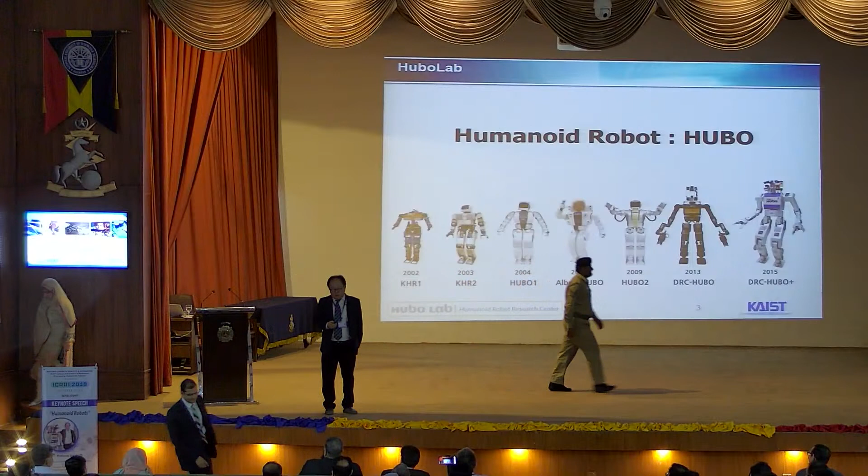I did not get the fund from the government anywhere, but my institution decided to support me with only 50,000 US dollars value. With that money, I made this one. It took just 1.5 years to build, and it was proven - it basically proves that it can work.

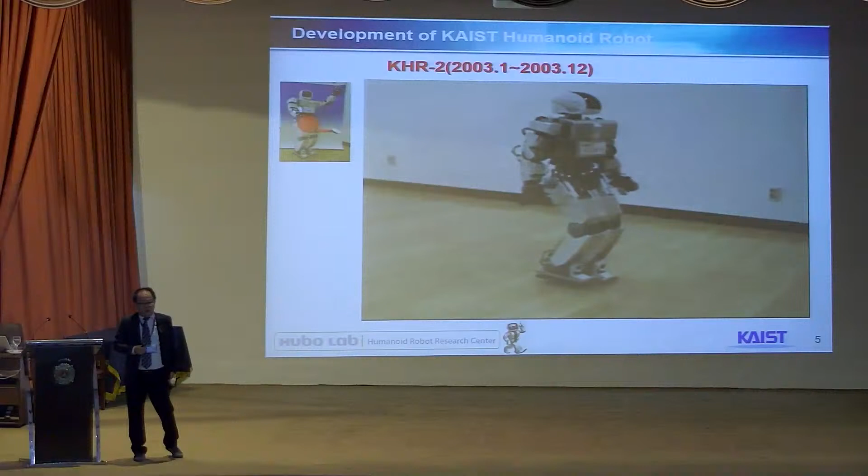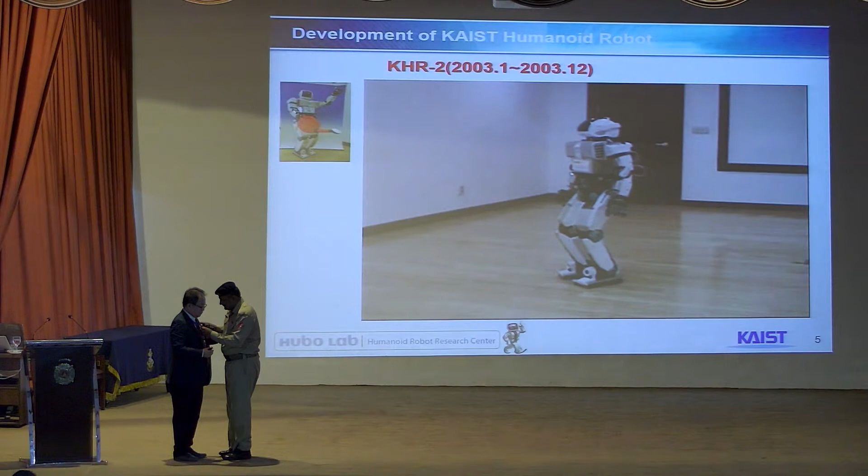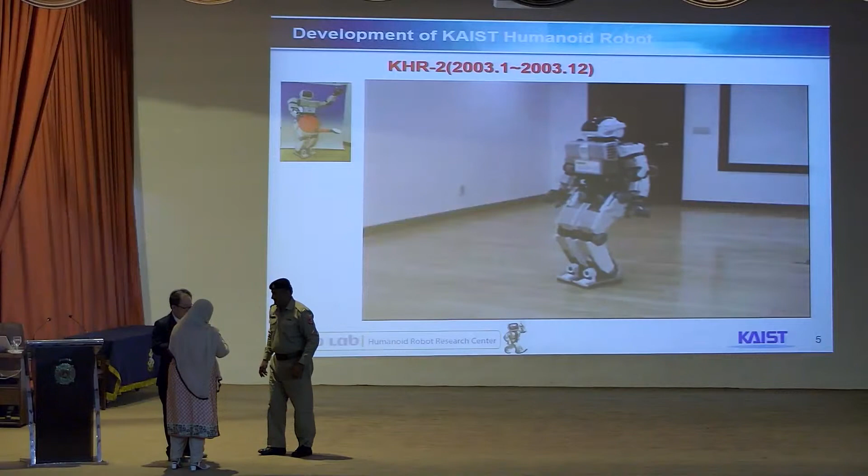When I released this machine with very limited budgets, the next year the government decided to support me with big money for the next one. That was the Hubo - it was born in year 2004. So thus far, it took only 3 years to create this final version of Hubo.

It is the third platform from KHR1, KHR2, and KHR3. It does have a vision system, 5-finger movements, and it can walk and make any kind of gesture that could follow human motion, as you see.

The next year, I was requested to make a very interesting, never-released robot, so I decided to make this kind of Android type humanoid robot. This very famous robot is named Albert Hubo, because his face looks like Albert Einstein, isn't it? He can move his face with very small tendons inside, and he can express his emotion through facial muscle movements.

This robot was very famous because it was first released at the so-called APEC summit - 20 world summits gathered, and it was announced on that occasion.

Another interesting robot the next year was the Hubo FX1, a human-carrying machine. It can carry up to 150 kilograms of freight, and it is controlled by joystick by the operator.

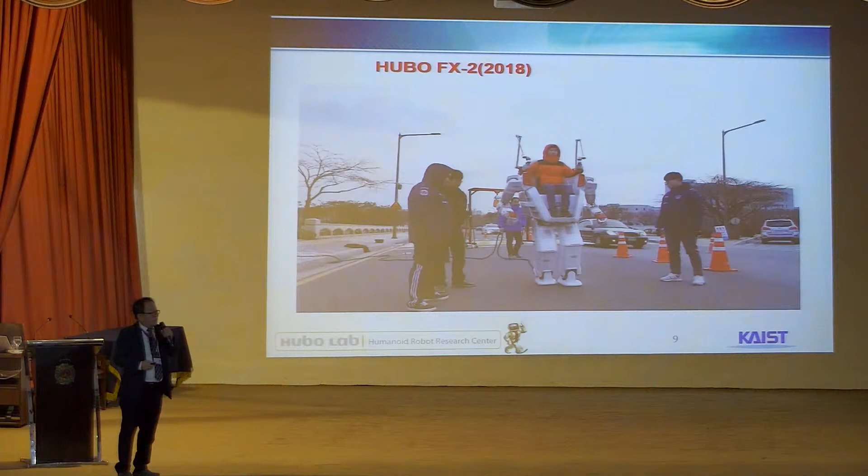This robot was revived 2 years ago, named FX2. This robot is a little more sophisticated because it has big arms - an arm can be controlled by a data device, so the operator could directly control the arm through the data device. This robot was specially designed for delivering the Olympic torch during the Winter Olympics 1.5 years ago, so this robot became very popular.

On YouTube, they are everywhere. This one is the first robot to deliver the Olympic torch in the torch relay.

This one was made in year 2009, named Hubo 2. It is very light - I believe it is the world's lightest robot at this size. It weighs only 40 kilograms and is very fast.

It can run, it can make any kind of gestures, including sign language. If you are able to read this sign language, it means hello everybody or something.

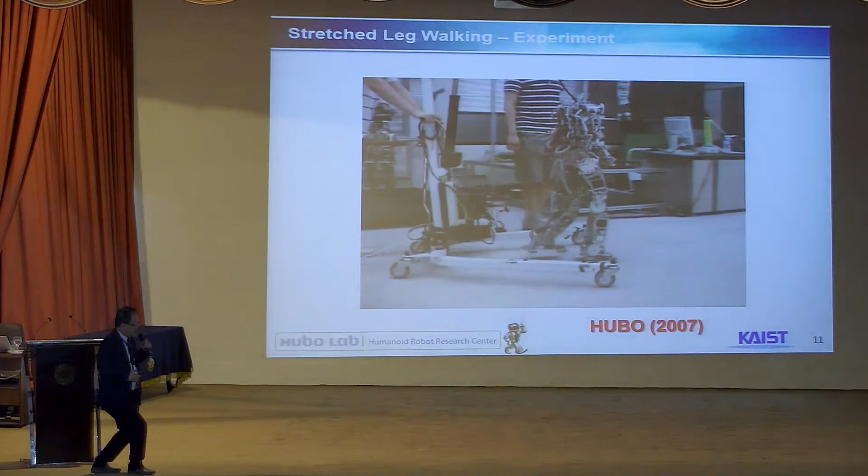In walking, we tried early the straight knee walking. Usually humanoid robots use bent knee walking like this way. The reason the humanoid robot is always bent like this is that this is the most stable form for humans also - if the ground is moving, you naturally do it this way.

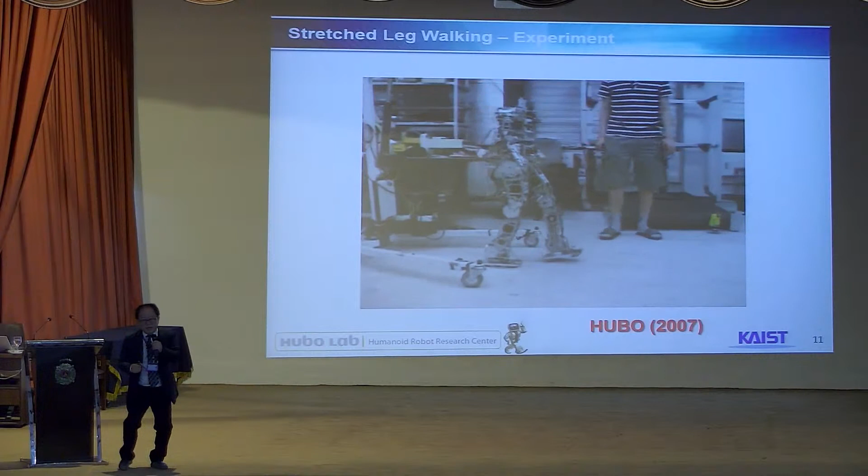Because in this pose you can move in any direction with your foot, the so-called horse riding form. So all humanoids use that form. Without that, it has to use dynamic walking.

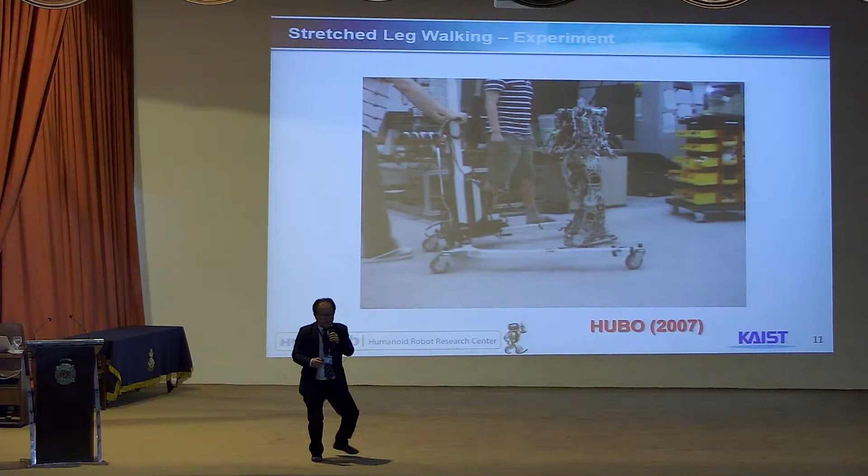Dynamic walking means you are always falling down, falling down, and you place your foot before falling down - that is dynamic walking. So during dynamic walking, if someone kicks your leg, you will fall down. But in static walking, it's stable everywhere, every time stable - that's the reason it's the most stable form, in bending walking.

In this straightening walking, it is very dynamic, so it can save a lot of walking energy, and it also looks more like a human.

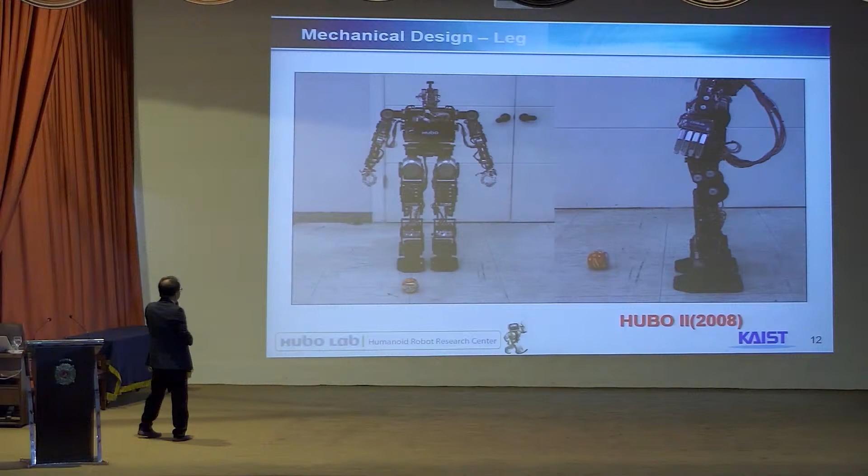This is another gesture of this humanoid robot - it can pick objects up from the ground, and it can fully fold its leg and knee. It can also make this kind of martial art form.

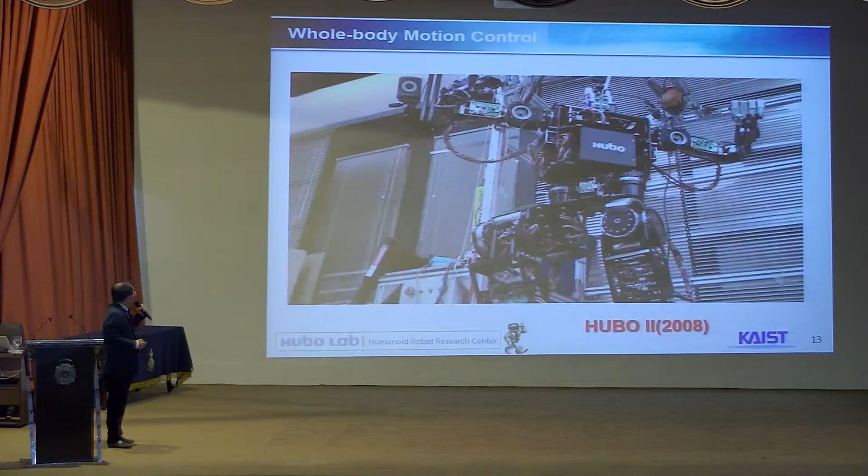To perform this kind of movement, all the joints must be compliant. It uses a very high gear ratio, 1 to 100. It's very position-based, velocity-based actuators, but by measuring the force torque sensor between the leg and also some inertia sensor on the chest, they stabilize and hold the body. The whole robot looks very flexible and compliant. That is very essential to perform that.

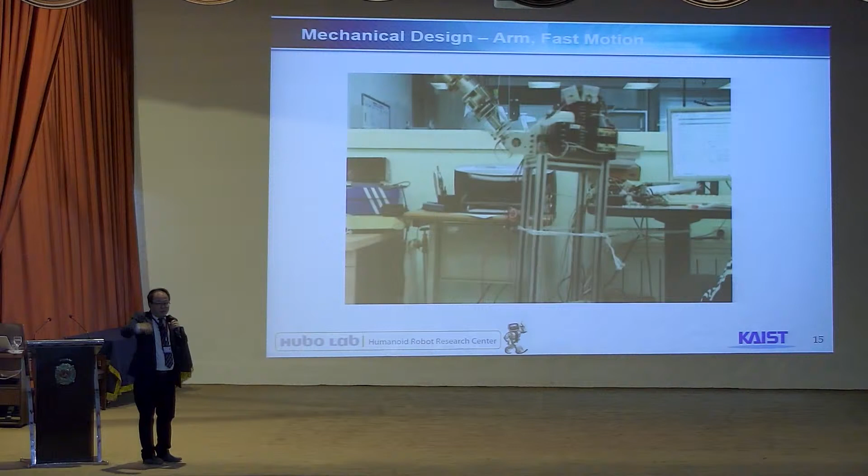This one shows how we could design the arm. The arm must be really fast, so stop and go motion - stop, go, stop, go, not a sine wave. To perform that, very precise control is needed. You have to manage the reduction gear in a very effective way, and also remove heat very effectively.

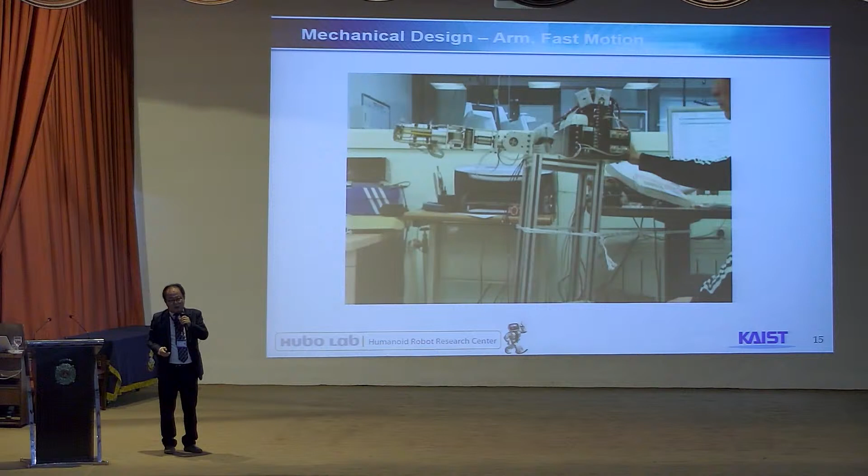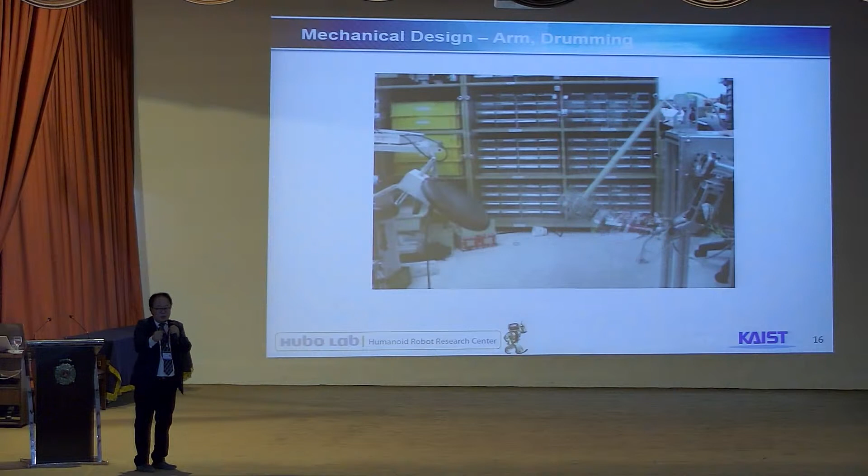We demonstrate this one. Hitting a drum is not an easy task for the humanoid robot, because the arm must be compliant and should accelerate from the rest position. The hitting impact must be very strong, and after the hit it must stop naturally, without breaking itself. We tested this when we designed the robot - the robot arm is powerful enough to hit the ball to the wall.

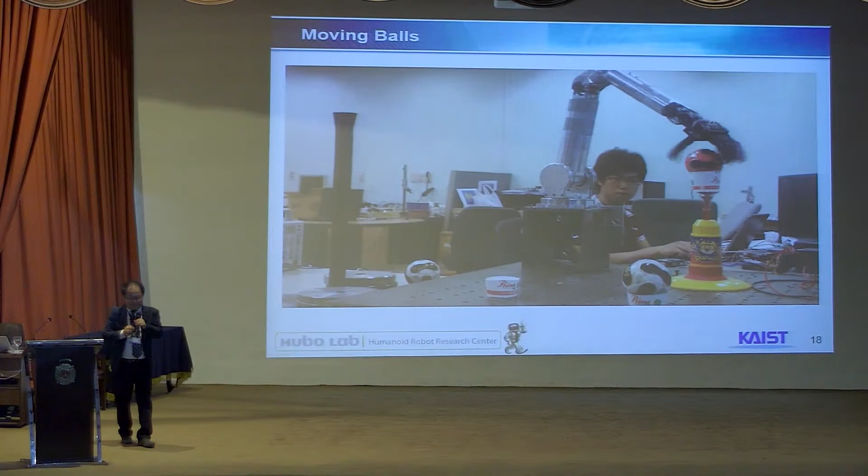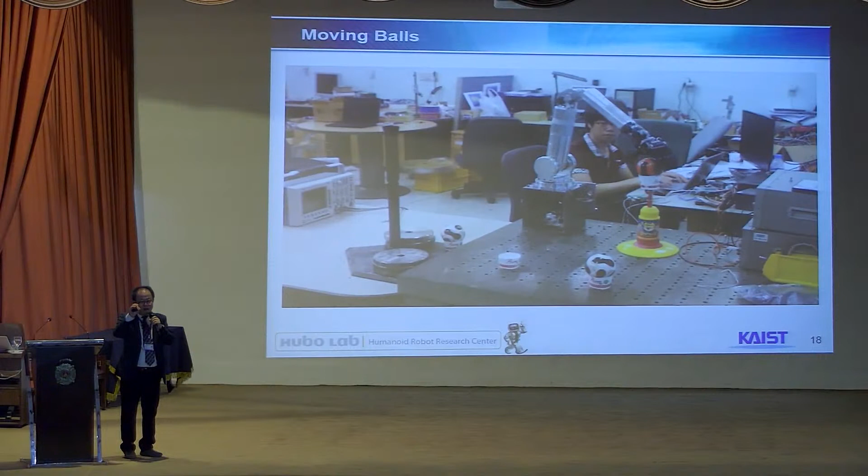We also tested this kind of thing - this is 1-to-1 speed, no acceleration, just very natural. This arm's weight is 3.5 kilograms, very light, and the hand itself is only 350 grams. We use this kind of hand on the humanoid robots.

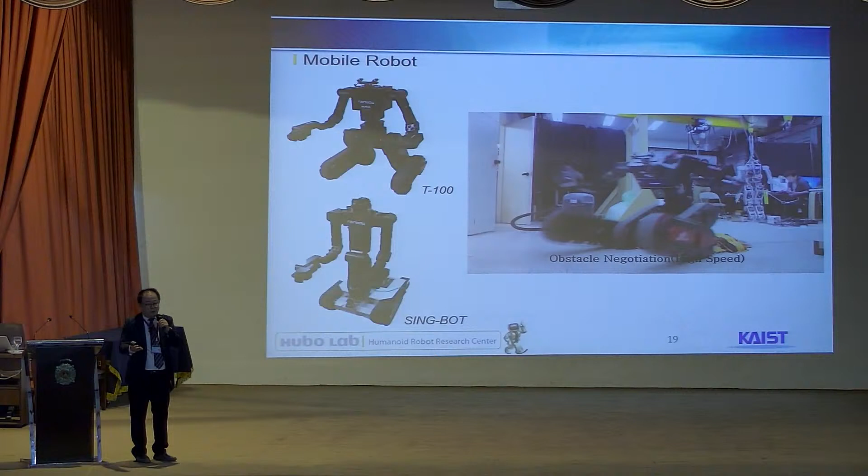We also use the upper body to handle heavier materials. This project was related to the Korean defense department, and there is a prototype robot to retrieve wounded soldiers or persons from the battlefield. It's supposed to carry up to 60 kilograms - that's 60 kilograms, so it's a prototype. It should also climb a 45-degree slope. This model was delivered to some other countries to make their own robots.

But anyhow, this arm technology was used to develop the collaborative robot. I'll explain this part a little bit later.

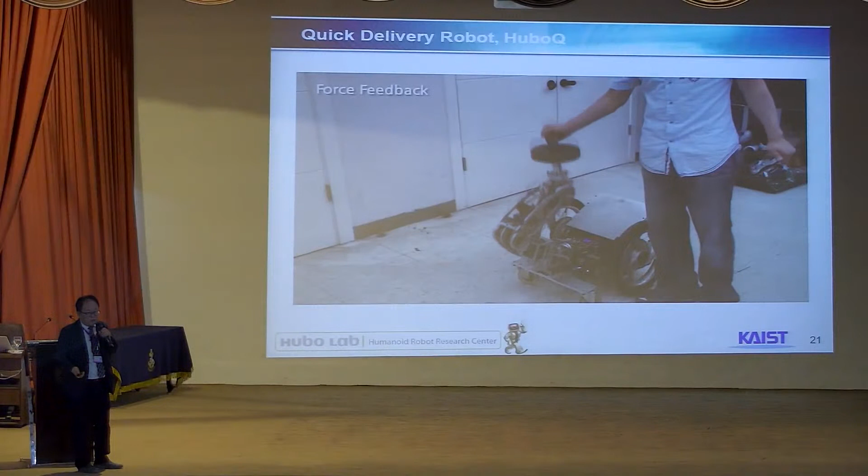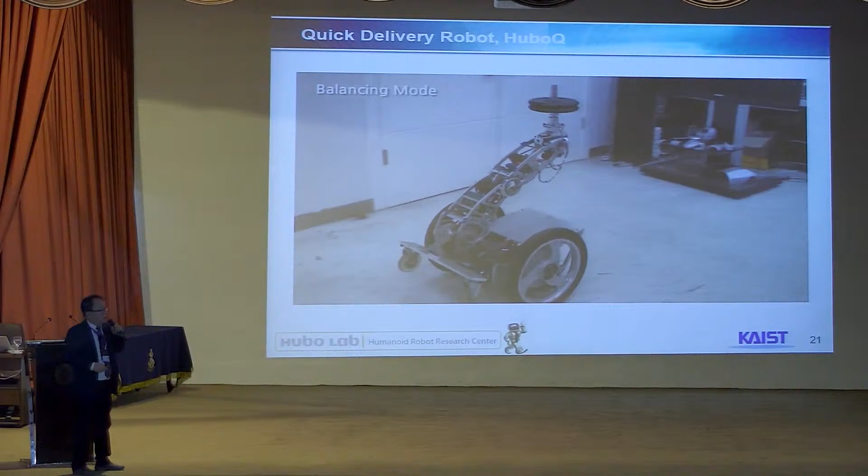The leg was also tested another way - we took the leg and put a Segway-type rolling platform under it, and it tried to stabilize itself so it never falls down. It can deliver a cocktail without dropping or spilling it. It's also very compliant. The force torque sensor mounted just below can amplify external force, like an exoskeleton. The operator can ride on this machine. It's very versatile - a very interesting toy for us.

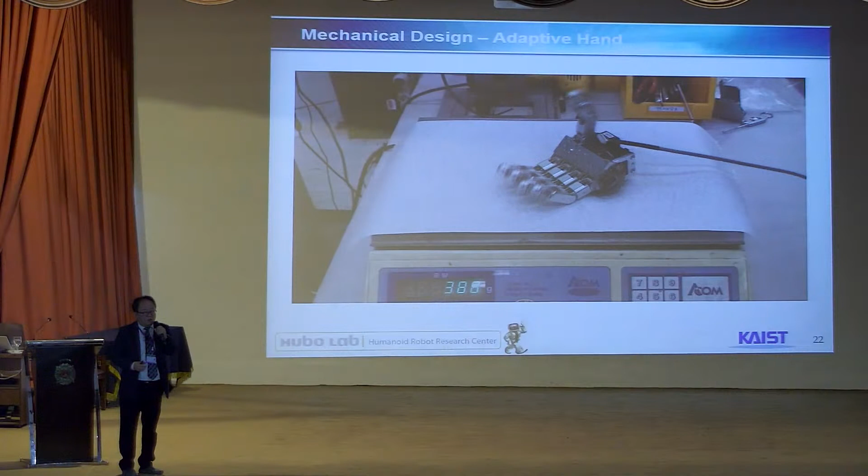Expensive also. This is a Hubo hand - it has 5 fingers and 5 motors independently, and is tendon driven and under-actuated, and it is shape adaptive. So once an object is decided, it grabs naturally according to the shape of the object.

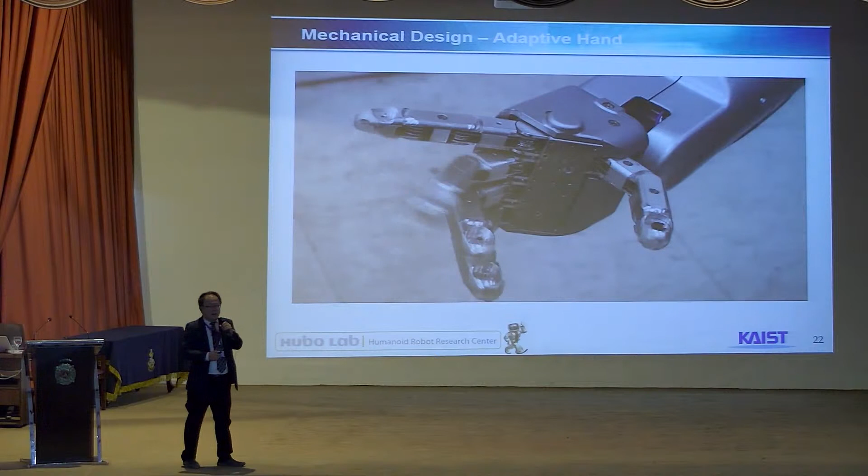As you can see, it can handle many things, and it's powerful enough - this is about 5 kilograms, it can handle 5 kilograms of objects. It can even hold a chair like that. And it weighs only a little bit more than 380 grams, including all the actuators.

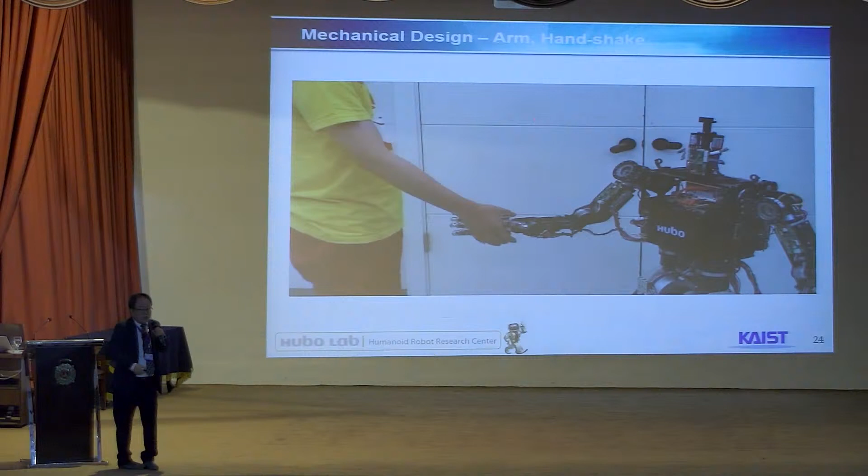Now it's watching. This is the wrist movement - it's 3-way movement in the wrist, making very general motion. It has a force torque sensor between the wrist, so you can detect external force and torque, allowing natural interaction with the human or environment.

We check the strength of the arm, so we ask him to do push-ups, and we torque him for a moment, and he survives and keeps doing it forever.

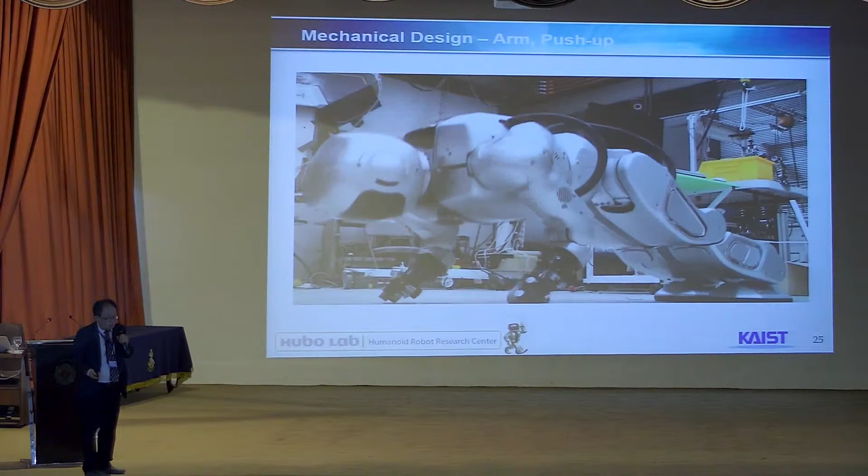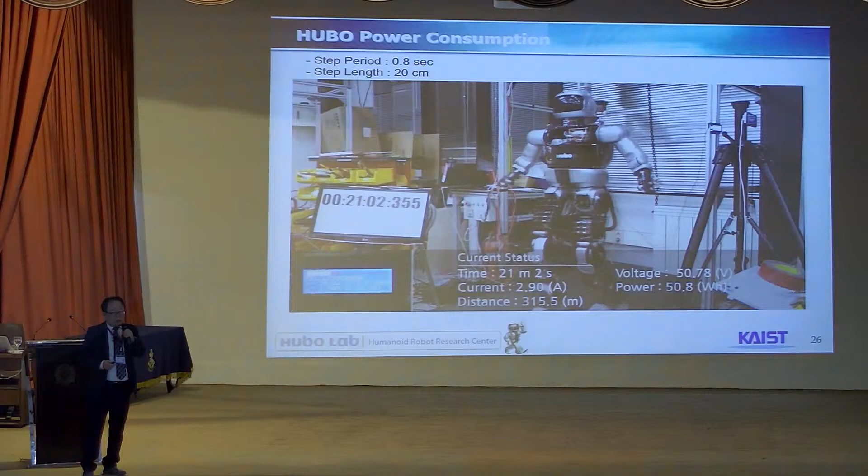We also check the time to endure the battery life. With a full charge, we just keep it walking until it falls down. Now you see 40 minutes passed - no stopping, just continuous walking. 1 hour and 20 minutes, still walking. 1 or 2 hours, still walking. And at 2 hours 13-14 minutes it falls down. So it runs more than 2 hours without stopping on a single charge.

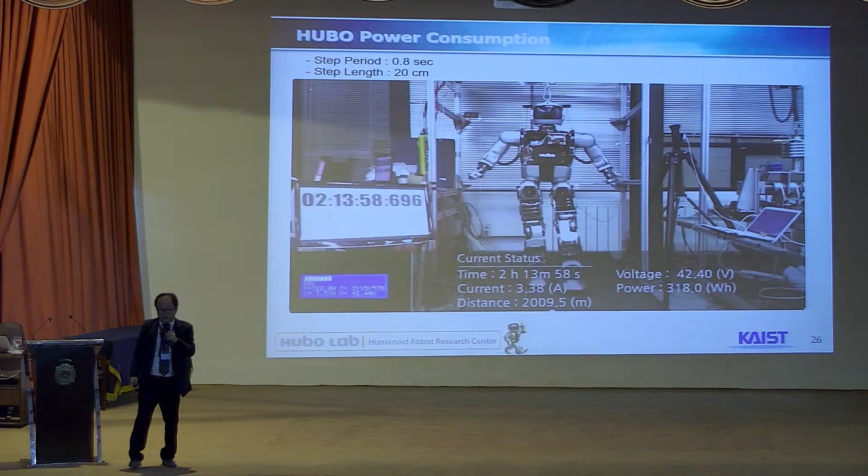We also check the temperature of each joint, and the delta T temperature increase is less than 5 degrees compared with the environmental temperature.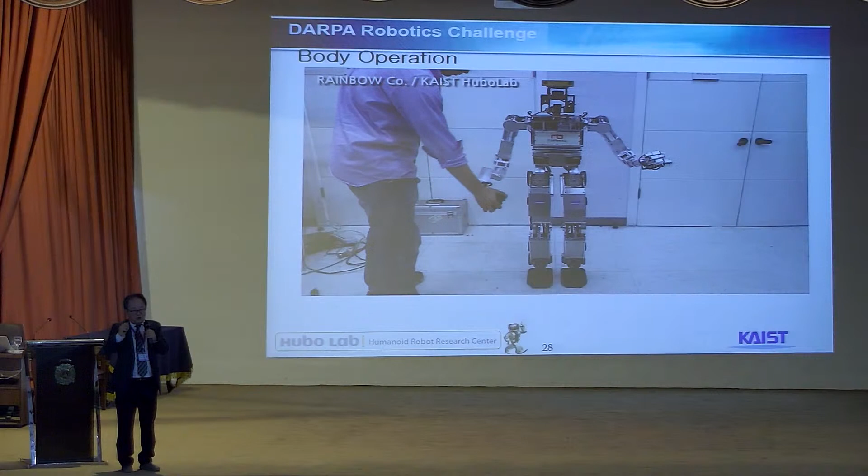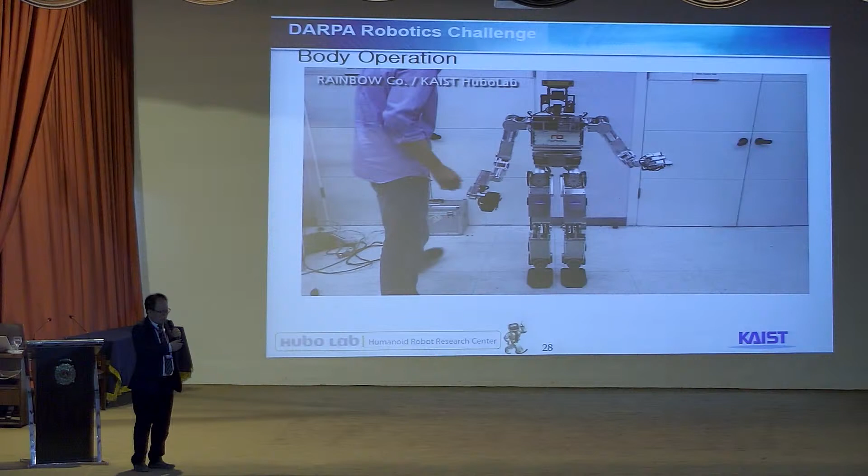The robot is very rigid, and we have to make it very flexible. There are two ways: you may have series elastic actuators or force torque sensors in each joint, but that makes the system complicated. So we did not use that kind of active torque sensor. We only measure current for the joint motor, precisely model the motor and friction, and then compensate for gravity, creating a kind of gravity-zero situation. With that technology, we can run these kinds of experiments.

For example, say the robot is supposed to drive a vehicle. The relative distance from the robot body to the steering wheel is changing, but it's still performing the rotation, turning the steering wheel. He does this without precise measurement of the distance between body and steering wheel, performing it through compliant control of the robot.

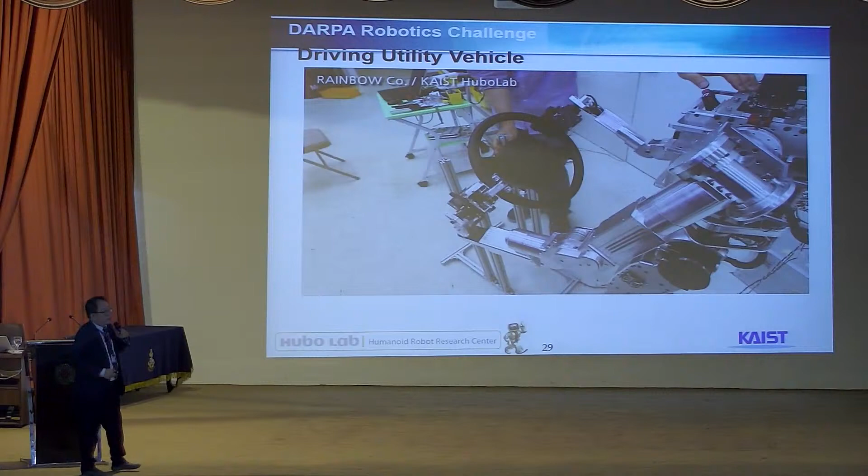To perform that, you have to decouple the coordinates and use Jacobians, etc., to make it work in specific directions. So for example, force in this direction, velocity in this direction, position in this direction—you have to decouple that without actively measuring force. We only used current. That is very technical, actually.

And also we check the balance, so he has to survive that kind of external impact.

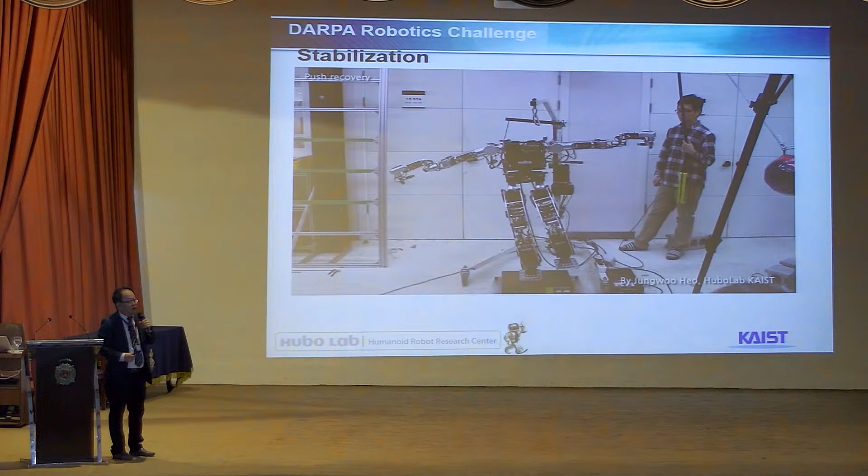And also we tested this kind of jumping on the stone.

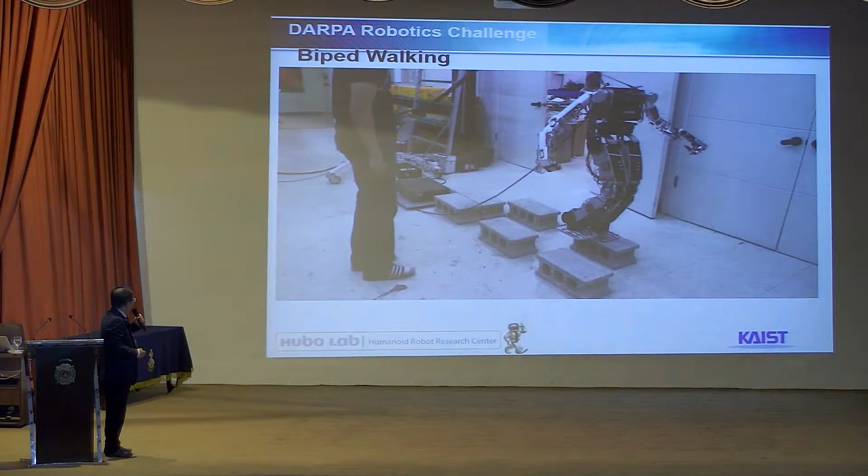And also we tried to go over rough terrain, because the slope and height are not specified. He has to have good kinematics to handle big height and big slope without losing stability. Each weight he's carrying is 3 kilograms.

Each one is like a very heavy weight on him—he's simulating his arm's weight—and he also has to survive this kind of very severe disturbance on the ground.

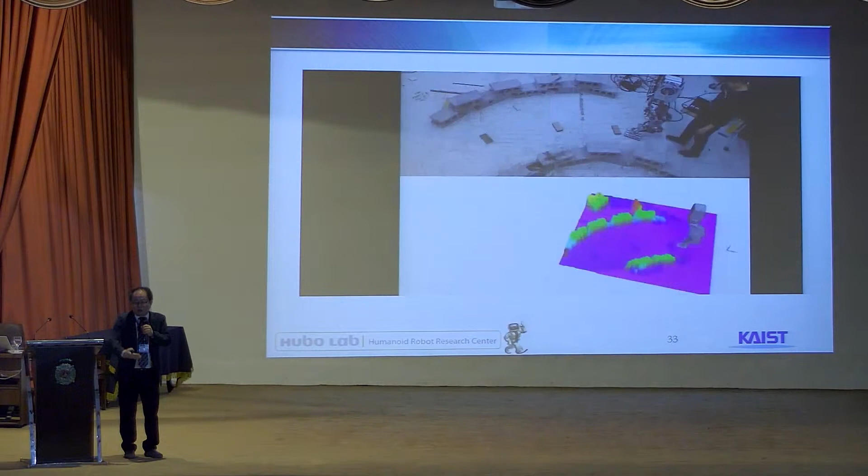We call it blind walking. Blind walking means the robot does not have any prior knowledge about the ground. He has to survive using only his tactile sensors.

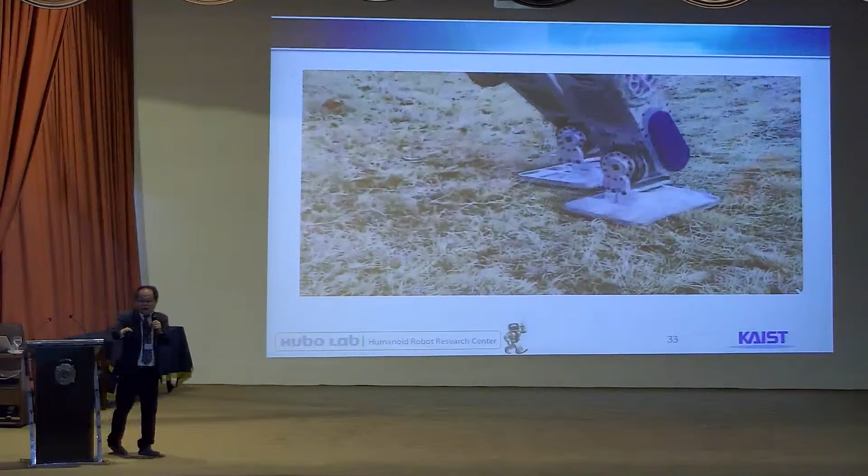He also has to survive on rough terrain, and also ground condition changing—stiffness changing over grass, over soil, over stone, or over concrete. We are testing those kinds of things.

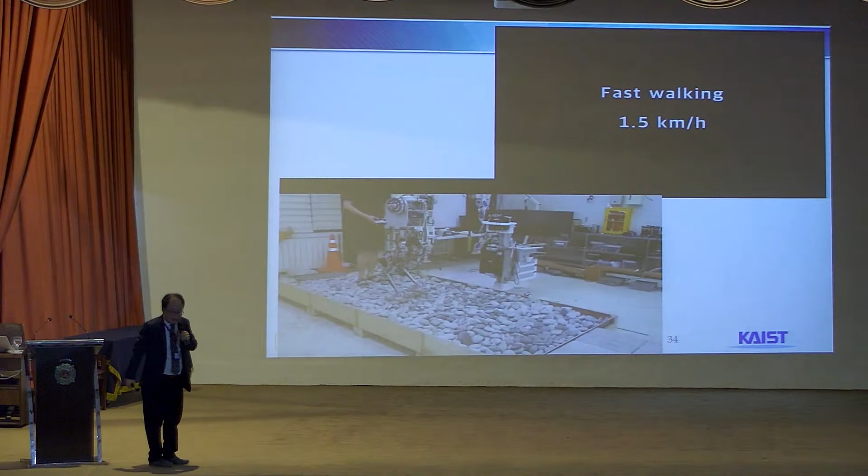So, stabilizing by stepping. There are three ways to survive when pushed externally. One is what we call the ankle strategy, where we basically just use the ankle. The next one is the hip strategy, meaning we use the whole body this way, like a counter moment.

The third one is stepping. Now he's testing stepping, and we also tested blind walking on unstable ground. I will show you again.

This stone is unstable, not fixed, so it is always moving and unstable. So during stepping, it's changing the orientation.

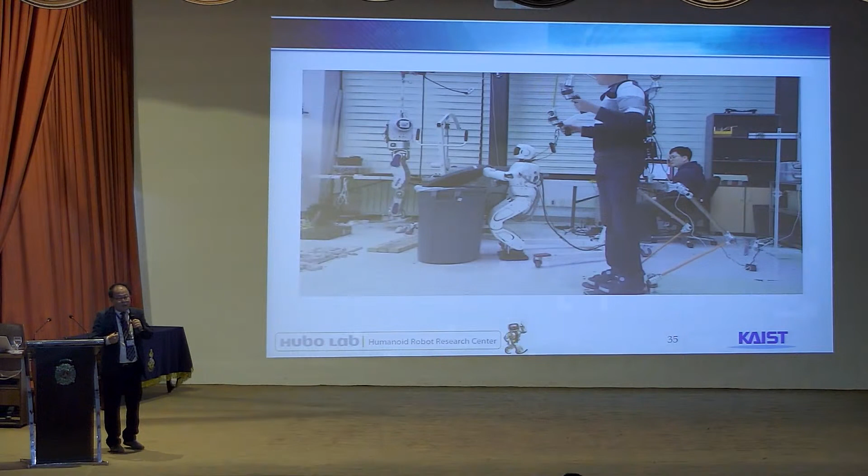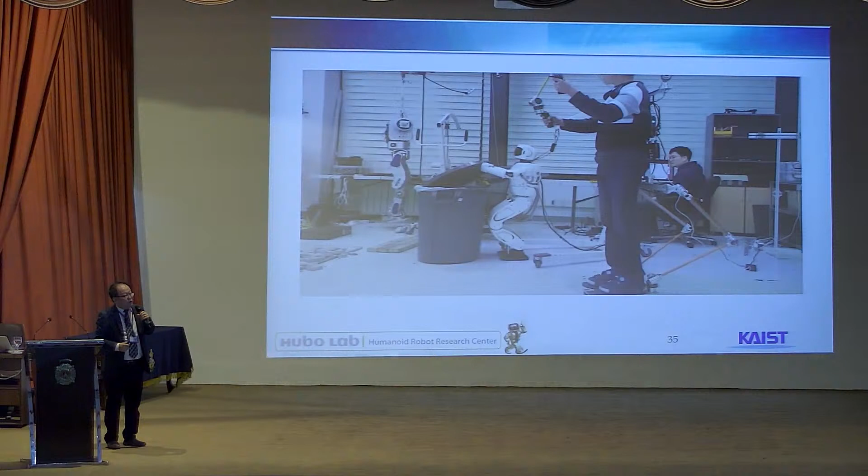So he is just following his footsteps, and it can be remotely controlled that way.

And this is a quadruped robot, which we recently started developing.

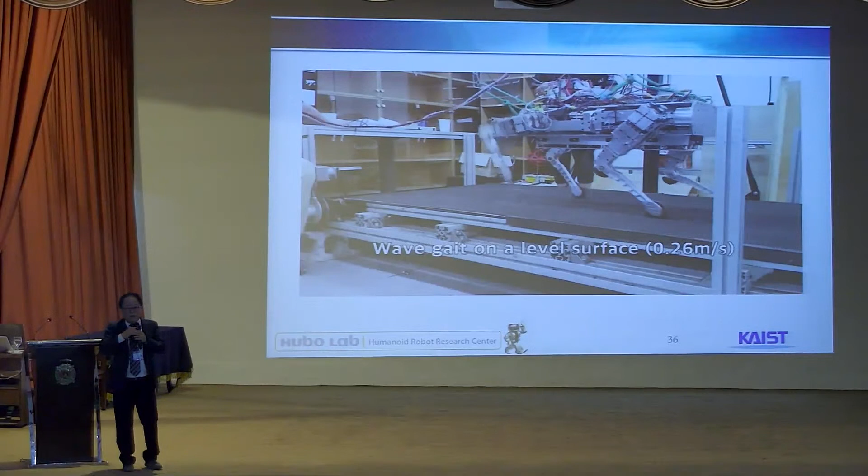One issue when developing this robot was how to remove heat effectively. When you design this kind of humanoid or bipedal robot, you should have less weight on actuators and reduction gears, and you have to draw big torque from the limited size of the robot's motor. To draw big torque, you have to apply very high current—then it burns the robot.

So the key is how to remove the heat effectively. If you can effectively remove the heat, you can power up three or four times without burning it. So we tested heat pipes, active convection, heat fans, etc., to find the way to remove heat effectively.

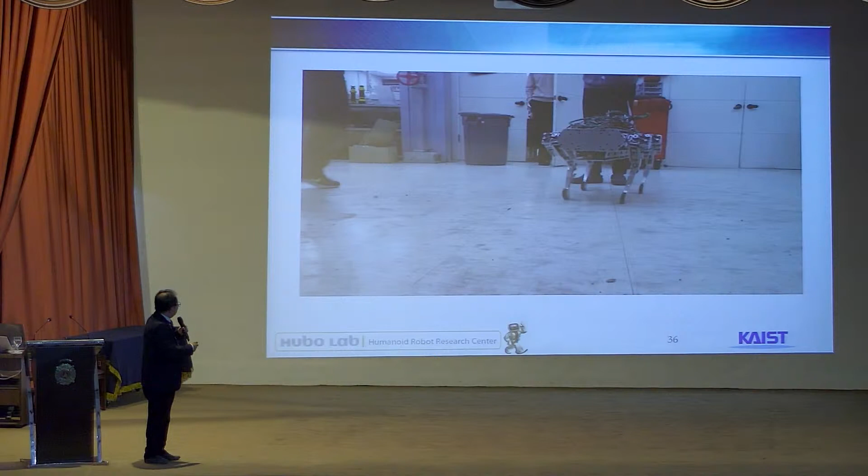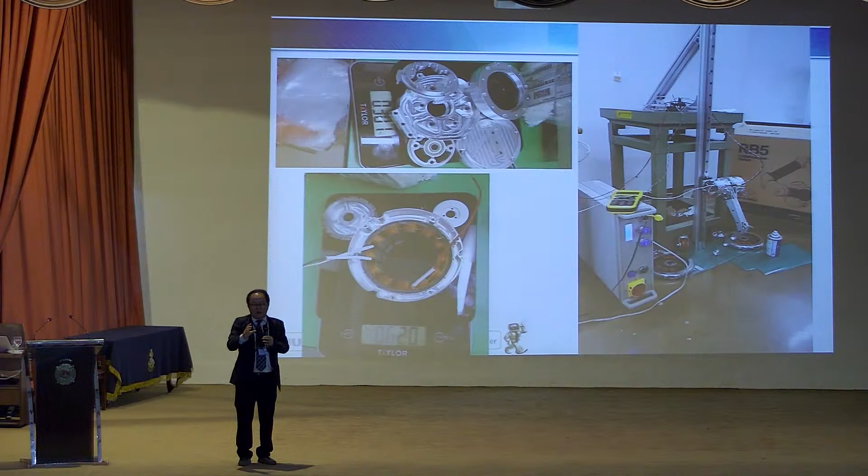We also have to make it lightweight. For example, starting three years ago, we began designing our own motor. We wound the coil our own way, because you can buy a motor off the shelf, but then you have to find the specification and design your robot based on that specification—that limits your design. So we changed direction, because to have a better, non-existing robot, you should have your own actuator with your own specification, and build based upon that.

So we can design all different kinds of robots and motors, and we wind the coils ourselves. Sometimes we invent our own winding machine, because the coil must be densely wound. So we invented our own winding machine and built it. And also we design—oh, sorry.

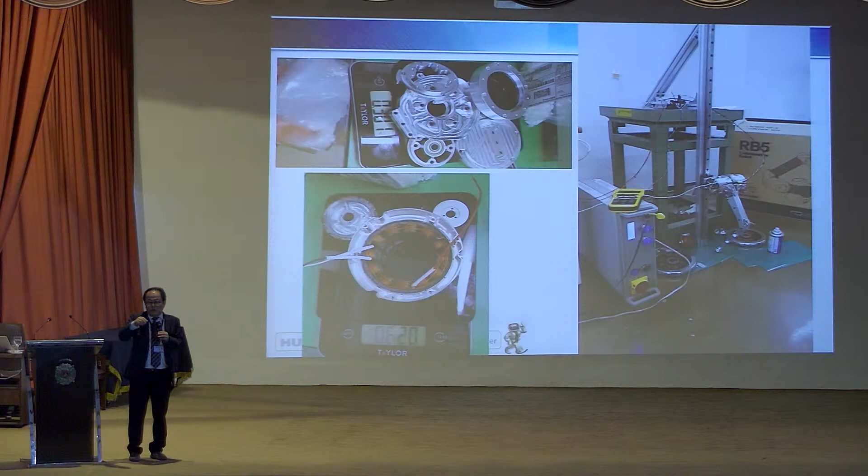We also have reduction gears. We have two types we've already made: a usual planetary gear or compound planetary gear, which we don't cut ourselves but design and ask others to cut and reassemble. We also have a cycloid gear, and to reduce friction we use very strong needle bearings inside.

We started 15 years ago from scratch, without any knowledge and without a budget. Three years ago, we started to build everything ourselves: actuators, motors, reduction gears, and everything else.

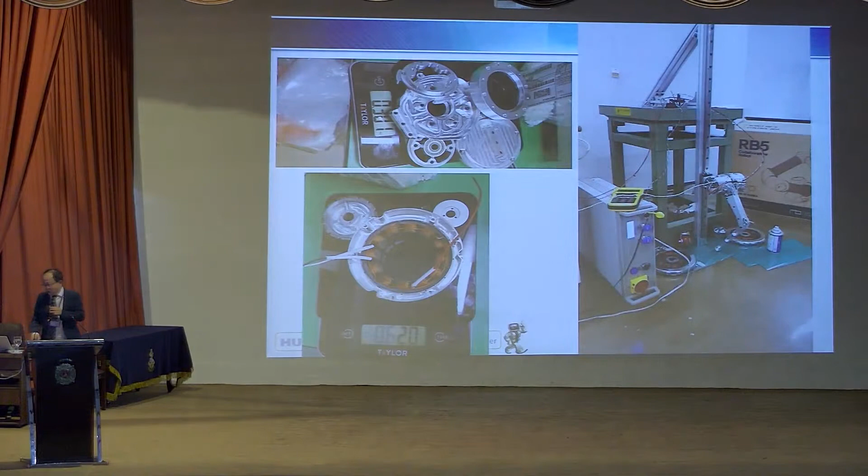We tested this actuator through a jumping motion. As you can see, it jumps quite high, drawing almost 20 amperes at most.

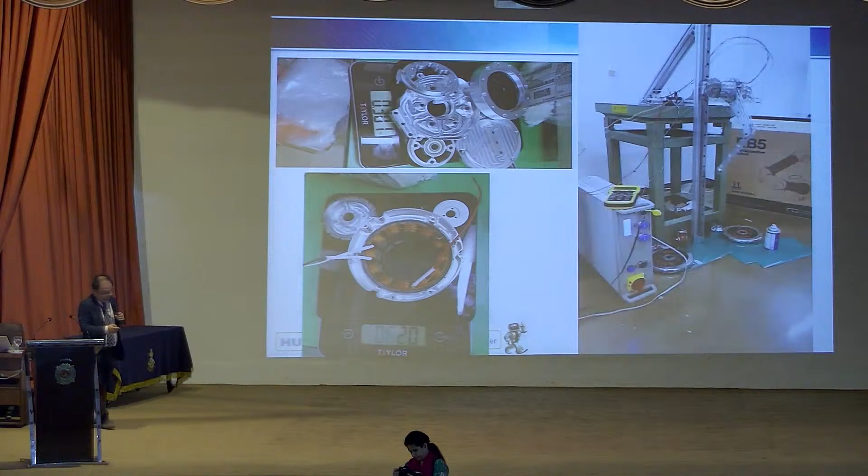Next, we built the quadruped robot using these actuators. This was made just one month ago, a very new one, and it was displayed in an exhibition. People liked it. It's not jumping yet, but it will be jumping very soon, like the cheetah robots. We are trying to achieve that very soon.

This one is hydraulic. We started studying hydraulic systems about 3 years ago. The difficulty was that nobody knows about hydraulics since there's no hydraulic engineer nowadays - it's old technology with no papers. Students don't like studying hydraulics because how could they write a paper without one? Without a paper, you cannot get a degree. So it was very hard, but I pushed my students that we should make it.

We started from scratch, nothing. We just read texts, and I designed the basic things. We started to make the valve - a direct drive valve. Usually these are two-stage valves: a small electric signal, then some hydraulic line amplifies that, and then it moves a big cylinder.

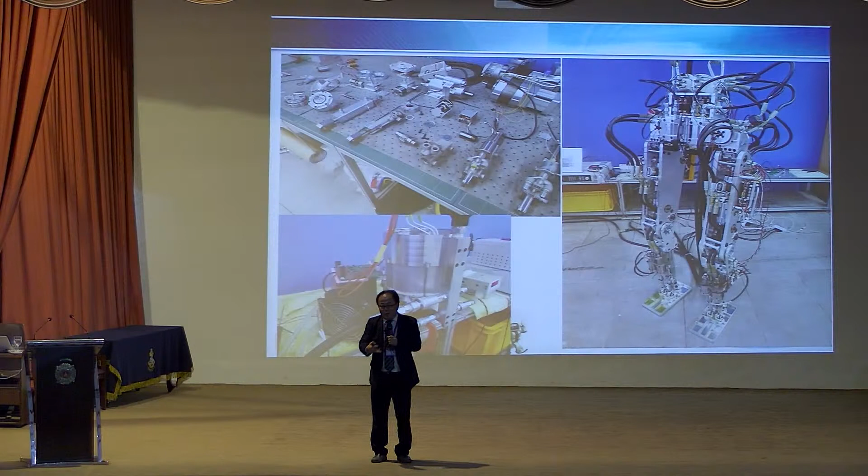This consumes 10% of total hydraulics. That means if your pump capacity is about 10 liters per minute, and each joint needs, say, 1.5 or 1 liter per minute usually, then each valve consumes about 0.1 liter per minute just for control. But for a humanoid robot, you need 15 or 20 actuators, so if you sum it up, half of your capacity would be used only for controlling the valves.

To prevent that situation, we use direct drive - a very strong servo motor driving the shaft directly. It needs 80 newtons with a very small stroke of 0.5 millimeters, so we designed our own magneto-electric systems.

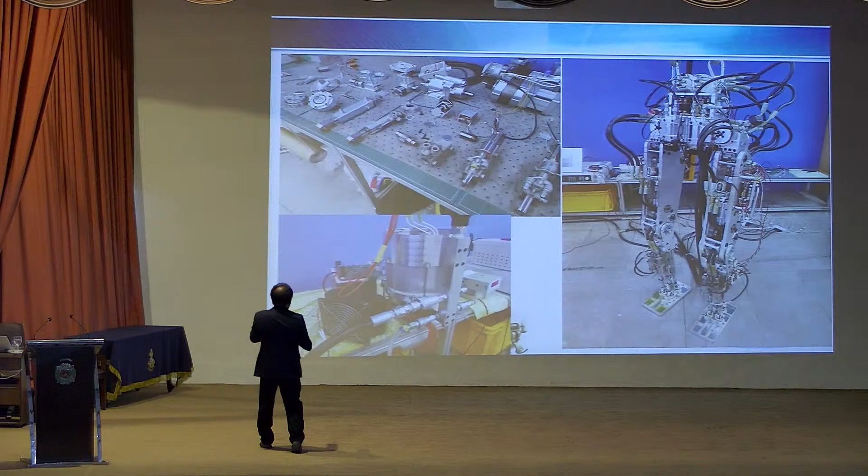We built, as you can see, all the cylinders and even the pump - we designed our own motor and pump system, and everything is merged into oil so the heat naturally dissipates. A commercial one, even a very good one, weighs about 20 kilograms.

Ours is 11 kilograms. We reduced the weight because it's impossible to purchase that kind of servo valve and cylinder in the market - industrial hydraulic systems are very, very heavy, mostly used for military bases, missiles, and so on. It's impossible to get them in the civilian commercial market, so that's why we built this ourselves.

We built all the parts through many failures, and we tried and built our own, 100% our own design. We don't buy the cylinder, we don't buy the servo valve, we don't buy the amplifier - we buy nothing, we just build it.

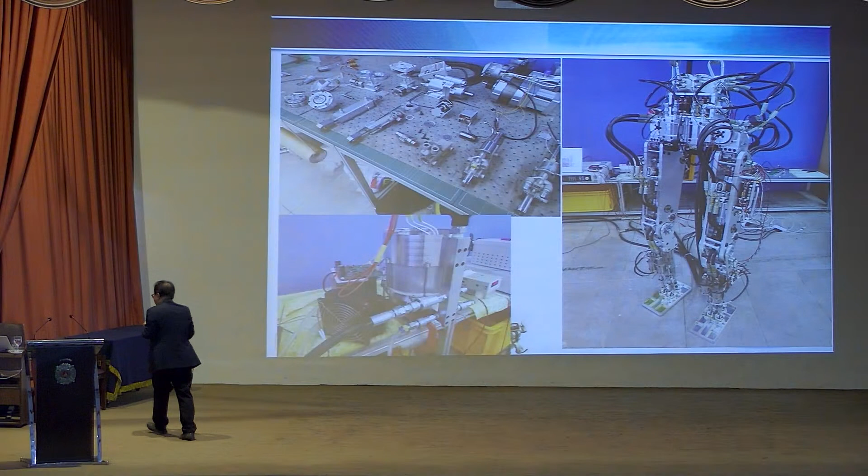Let's see how it moves. We are testing the circular actuator, which has our own pressure sensor and pressure feedback - that's a very hard task. We also made a jumping leg with our own system, and it jumps.

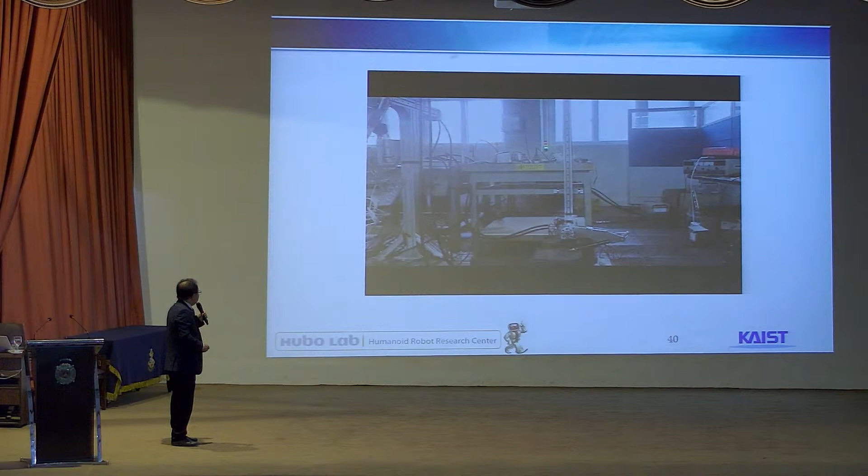We tested the strength, and also built the whole body for testing position control and torque control. It worked. Now next we're making the whole body motion work.

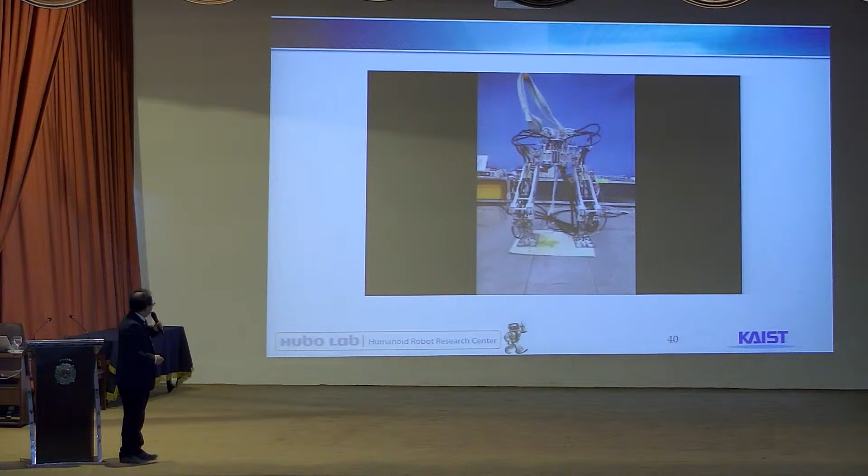The strange sound is the pump being adaptive - the pump has feedback, so it proportionally changes the rotating speed according to hydraulic consumption, which maximizes efficiency.

I'm at KAIST in the Hubo Lab, and we spun off Rainbow Robotics company based on the knowledge learned thus far. My 5 PhD students joined Rainbow Robotics. We now have 37 employees working together, 9 of whom are PhDs, and 5 out of those 9 are my own former PhD students.

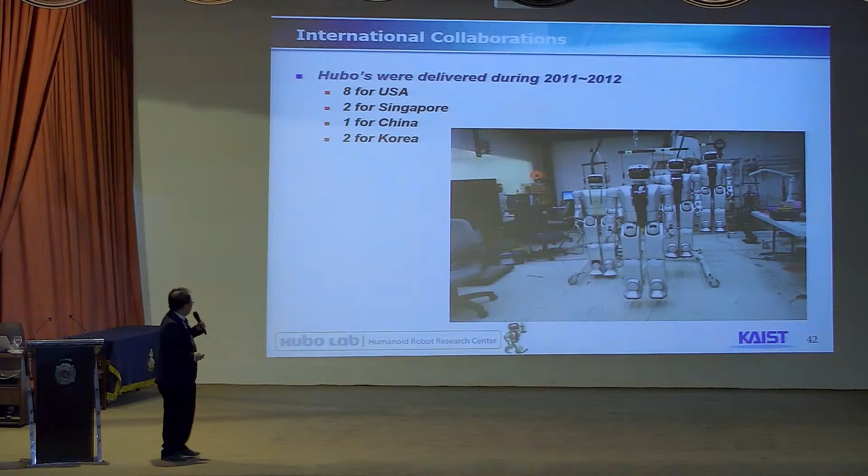They are very much experienced in designing robots, control, and playing with robots, and we have a very strong bond inside. So we delivered a Hubo robot in more than 20 places all over the world.

Recently, as I explained, this collaborative robot is 100% made by Rainbow Robotics, except the reduction gear. We are using harmonic drive gears, but we have the motor and motor winding machine, brake, driver operating system, user interface, UX, UI, and design. We have our own designer, and everything else.

So this is from our site. I'll just show you how it's working. There are many applications. We have 3 different sizes according to the necessity. At last, I'll show you the last part.

Okay, over there, we demonstrate a cocktail machine. So it's a robot vending machine. We're delivering and mixing different kinds of extracts, putting in some ice, and making the drink.

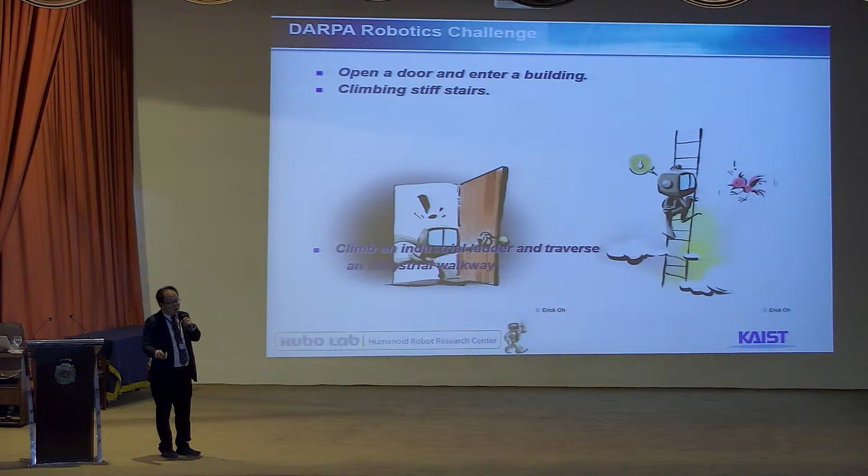Everyone knows it has 8 challenges. The robot should drive the vehicle, get out of the car by itself, get into the door, open it, turn the valves, and handle some sudden surprise missions, climb up the stairs, go over rough terrain, etc.

The condition is that there is no decent connection. Remote control is not allowed. Once the robot is installed, the operator is located about 300 meters from the building. Examiners watch that there's no cheating - they take away all cellular phones and cut the Wi-Fi lines. The Wi-Fi line is connected, but they have a scrambler inside that scrambles the signal.

Once scrambled, the bandwidth of communication drops to 9.6 kilobits. That is called TTL level, just what we call beaconing level. With that kind of low bandwidth, it will take say 10 minutes to get a decent, steady picture - no dynamic picture, only a steady picture. Also, the signal is scrambled and stops, and there's a switch, there is scrambling.

So it intermittently connects and disconnects, but they guarantee it will be connected once a minute. For a very short period of time they open the full range, 100 megabits, and you have to utilize that time. That's very realistic - in a real disaster scene, the internet is connected, disconnected, connected, disconnected. But with this, beaconing is allowed.

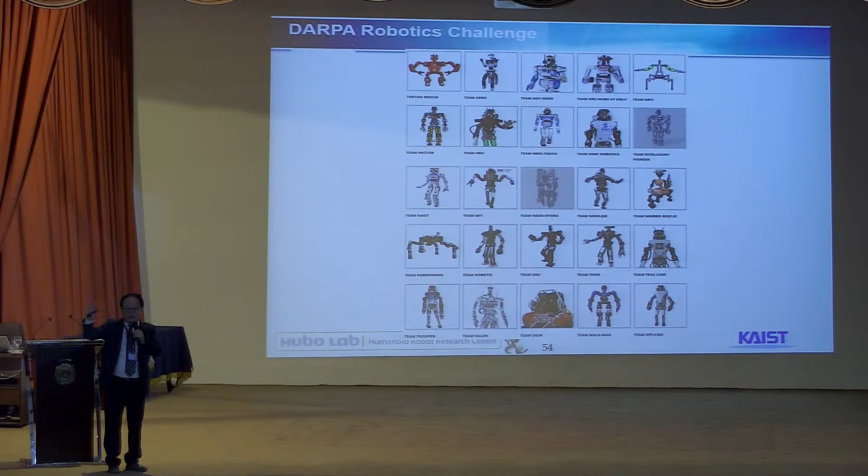At last, 25 teams were selected, and actually 9 of them used the Atlas robot, joined by 4 HRP robots - the very finest Japanese one. This one here is the HRP, at most right. This is Atlas - 9 Atlas robots, 4 HRP, and Chimp.

There's Jaxon, which follows the Shaft robot, and this is NASA's Robosimian, for lunar missions, the space mission one. This is a running one, and this is from IIT, a very famous one - making up the 25 teams.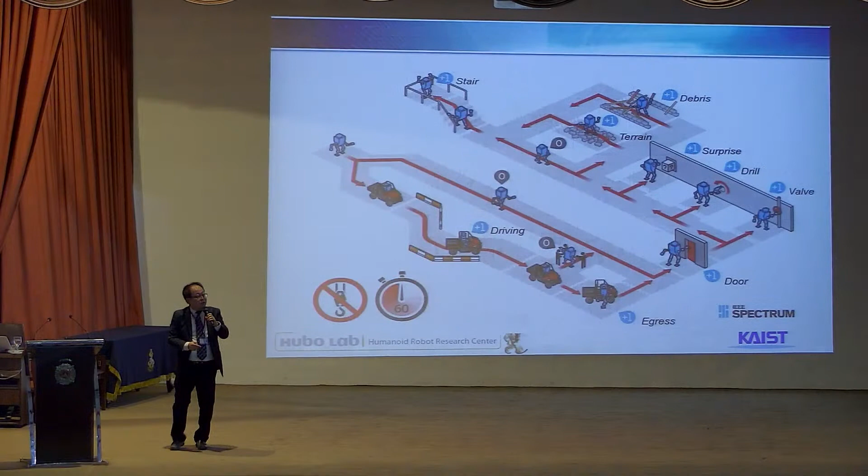And the course was something like that, as you see. Everyone's familiar with that. We won, and this briefly shows how it works, 20 times faster, 18 times faster.

As you see, Hubo slides out from the vehicle. That's a very hard task, without breaking his arm, and transforms into a rolling base. Someone is cheating, but there's no rule against it.

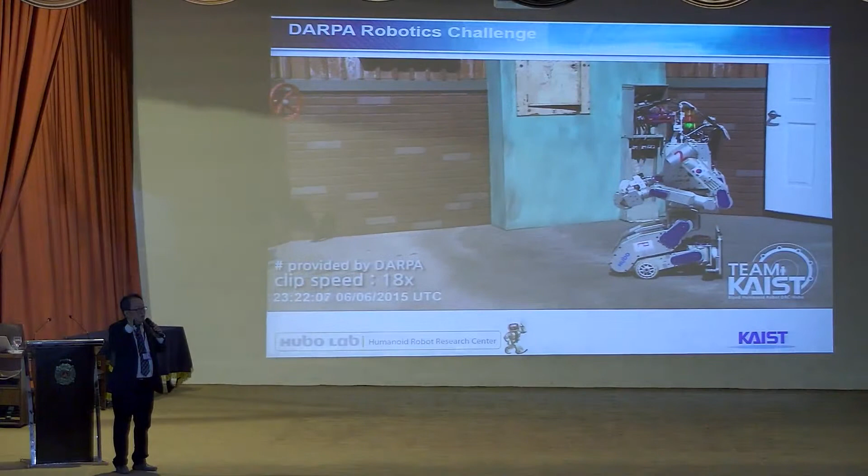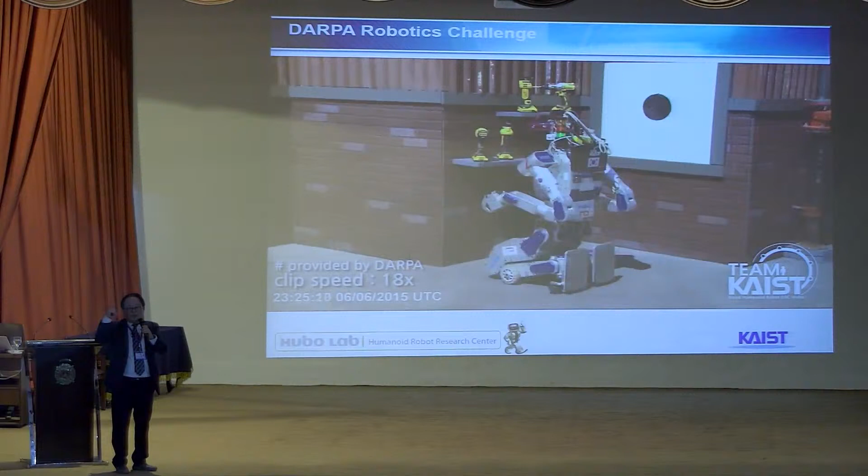He opens the door. From there, the operator cannot instruct what to do. So our strategy was that we instruct them what to do. For example, we wait to get the disc picture in one minute, analyze the situation, then pick that robot, send it there, and get the door. We pick the points and transform them in 3-dimensional way.

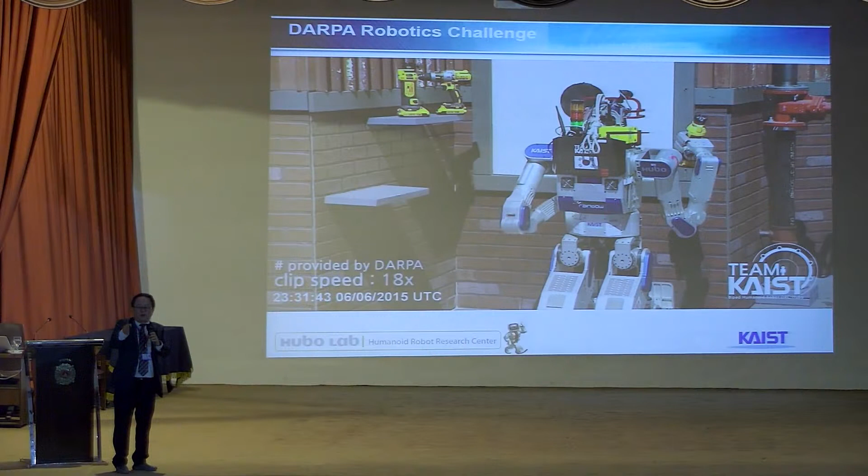From that, he uses LiDARs to match the points, and finds the way by himself. So we instruct them what to do, and he has to find how to do it by himself. That's our policy, the strategy.

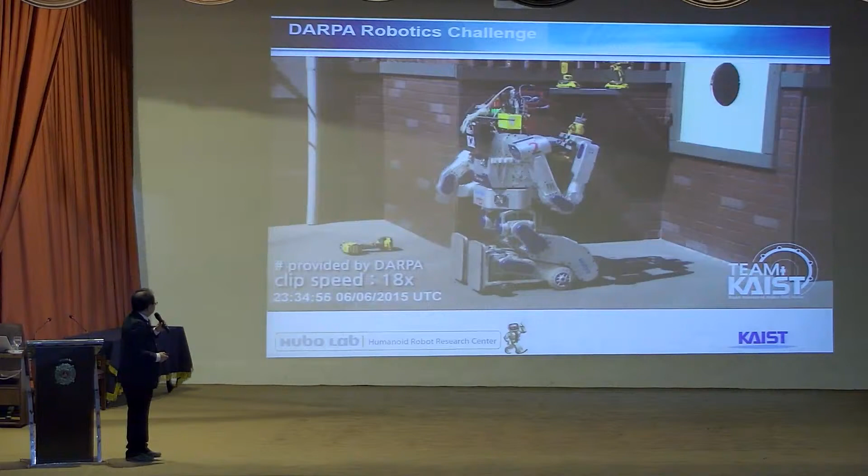So he made a big hole. What happened was that the path of walking was blocked, so first he has to remove that obstacle. We instruct them to remove it to clear his path. This is a very hard task because it's a sudden mission, not specified before.

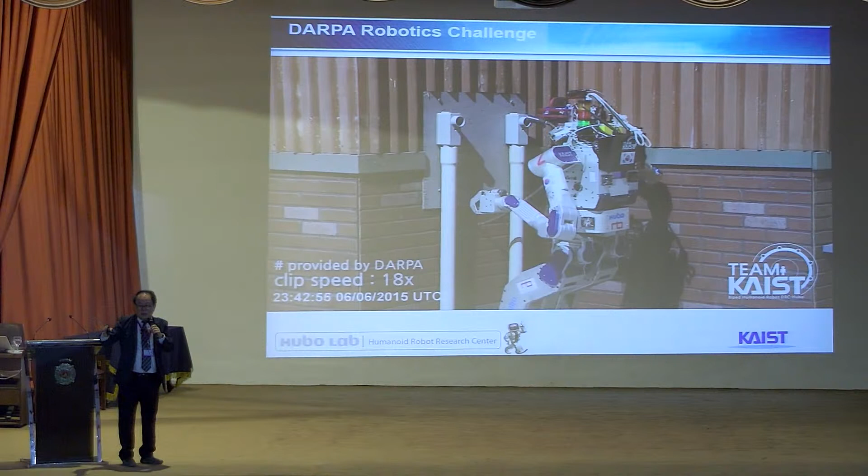It must be solved by himself 100%, or remotely controlled. But by himself is impossible, so we have to control it externally.

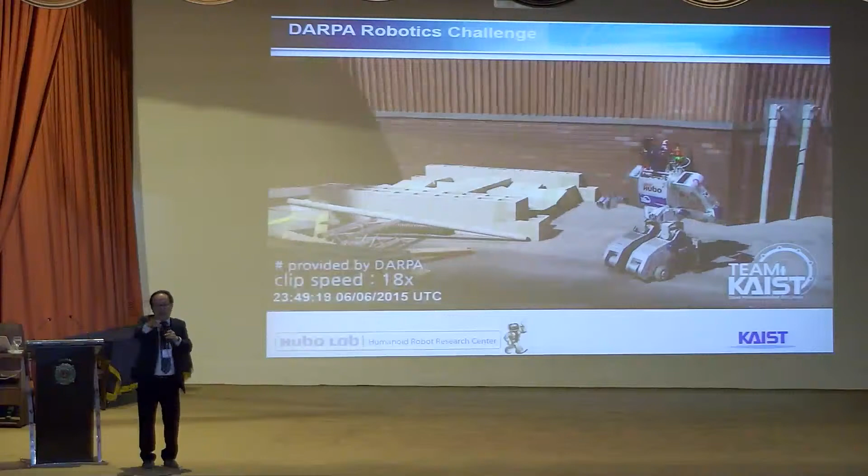The way is the same. We took a picture, with 3-dimensional scanning. Now in the operator room, we see the 3-dimensional environment, simulate the motion, and give the instruction in 3-dimensional way. Then we send the signal, a very low signal, the lowest signal, and he follows. Then we check the signal again.

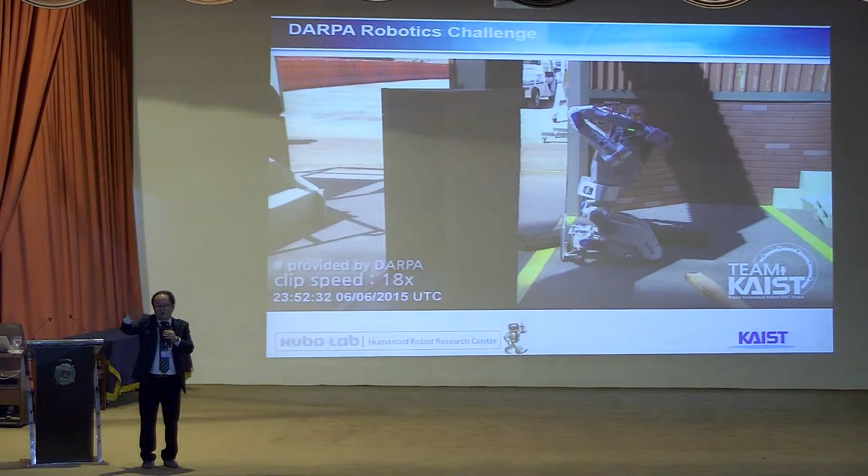It's very similar to a space mission. On Mars, the communication time is about 20 minutes to 1 hour. They operate in a similar way.

This is the moment of triumph. It's a slow video to celebrate the moment. Okay, this last step.

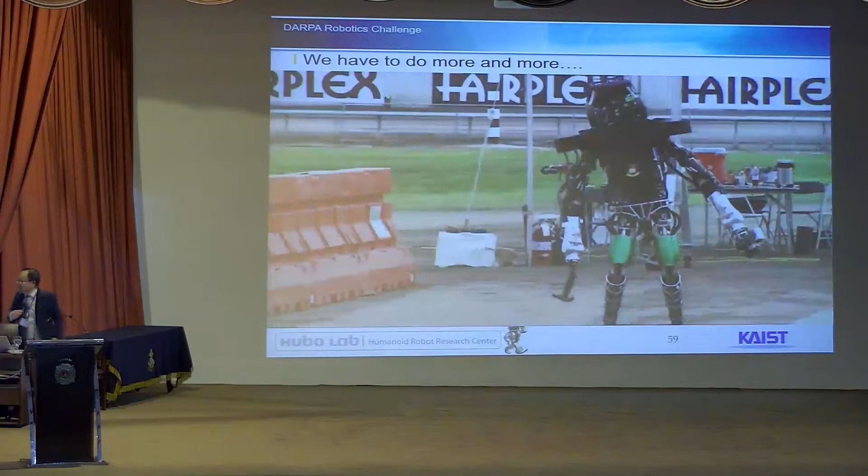That is the reality.

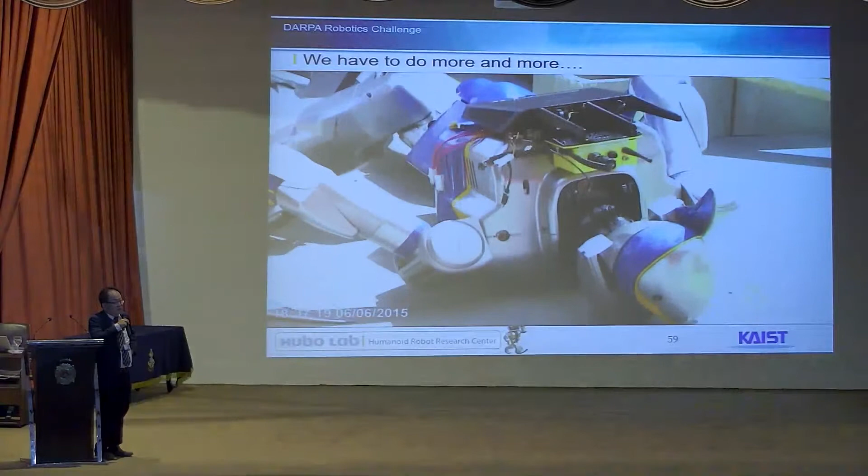You've shown wonderful progress in humanoid robots, and your first one was just what? 50,000. What do you put that down to? Did you have fantastic students, fantastic technicians, or fantastic industry partners?

Because I'm always saying that I was born as an engineer. So when I see a camera, I made my own. Not working, doesn't matter, doesn't work, it doesn't matter. I want to make my own. I don't like to buy.

So from before elementary school, I made rockets, airplanes, and boats. Making a boat means not buying a kit - I start from solid wood, cut it, and put in my propellers. I make my own servo, and I made the magnets. Even my servo, I modified my walkie-talkie.

It was done in early middle school. I also made my own long-range walkie-talkie by myself, and sometimes made black powder and rockets by myself, burning my grass. I made everything - my own telescopes and my own mounts.